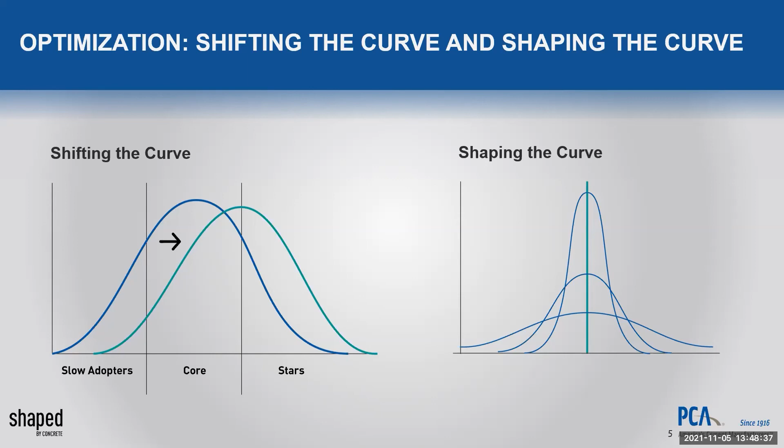So ideally, I'd like to see a very narrow difference between the star performers and the slow adopters. I would like to see an industry that across the board is very innovative and is really pushing the envelope. Next slide, please. So that was thematic concept number 2, call it.

Okay, so optimization, we talked about intentionality. Here's the big theme, the last theme I'd like to kick off with. Society needs concrete. Now, like it or not, every single construction project worldwide uses some amount of concrete. I don't care if you're building a log cabin in Idaho or a skyscraper in Toronto, you're going to use some concrete. And it is truly the universal building material, because even if you're using mass timber, steel, composite, whatever, for the superstructure of the building, you'll still use some amount of concrete.

And concrete needs society. So as I talk about this roadmap, one of the things I want to get across to people is that we can't do this on our own. And by we, I mean the cement industry, the concrete industry. We need everybody who touches our entire value chain to help us out. That's really critical. So society needs concrete and concrete needs society.

Next slide, please. So for those of you that might not be familiar with cement and or concrete, let me give you a distinction here. The analogy we like to use is that cement is to concrete as flour is to cake. So if you're not an engineer or an architect, or you're not involved with materials, that's always a good analogy to keep in mind. Cement is to concrete as flour is to cake. So I represent the cement industry, but cement is only one component of concrete.

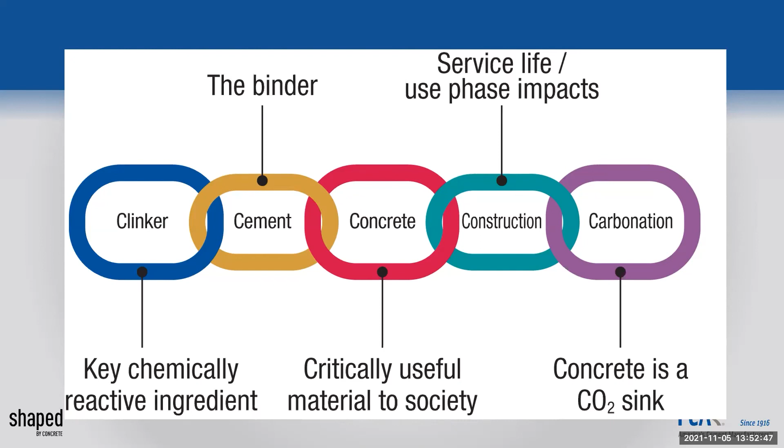Making cement starts off with transforming calcium carbonate or limestone into lime and carbon dioxide. That is the very initial reaction we need. And without that reaction, we don't make cement, period. Now that reaction requires a material temperature on the order of 2,800 degrees Fahrenheit.

Let's put that in perspective. The average consumer's oven or stove reaches maybe 500 degrees Fahrenheit. Surface temperature of the sun is about 10,000 degrees Fahrenheit. So we need material temperatures of about 2,800 degrees Fahrenheit. That chemical fact of life represents just over 60% of the CO2 that our industry puts out.

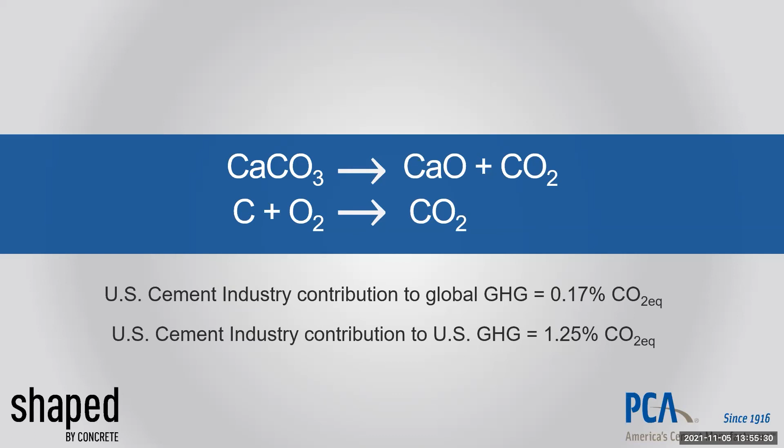So if you look at the US cement industry, we account for about 1.25% of the equivalent CO2 emissions in the US, and just under 0.2% globally. And by the way, CO2 equivalent, so the vast majority of our greenhouse gas emissions are almost entirely CO2, but there are some methane emissions that get included in there.

Next slide, please. Now look, and I know there's a lot of students, so don't ever take anybody's word for it. If you really want to do those numbers on your own and figure out the percentage, you can do that, because the cement industry, by law, we have to report our CO2 emissions. And you can go to the EPA's FLIGHT database. It's publicly available. The acronym is Facility Level Individual Greenhouse something or other, who knows.

But anyway, you can actually go in there for every industry that has to report GHG emissions, and you can screen and filter. And I just checked again yesterday. So if you do that for the cement industry, we have about 92 operating plants in the US, and they produce roughly 66 million metric tons of CO2 equivalent. So that becomes your numerator for that fraction.

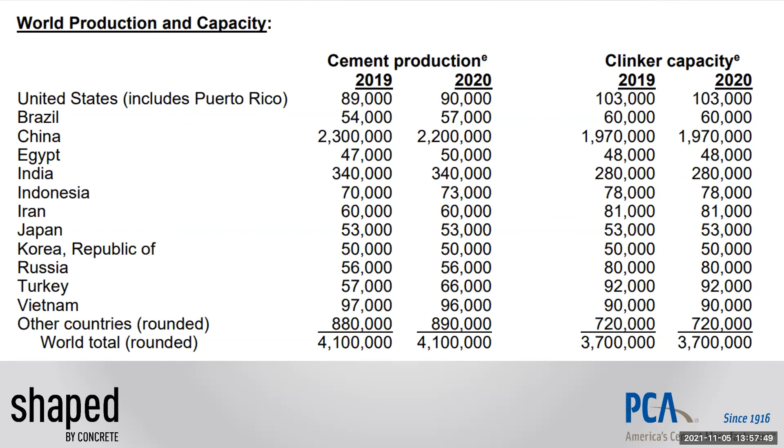Okay, so what can we do to reduce that number? Well, firstly, we can start at the cement plant with this intermediate product called clinker. Now, hopefully you've probably seen fresh concrete, and maybe if you're like a lot of people, you're tempted to put your handprints in the concrete. Please don't do that. Fresh concrete is a very caustic material. It has a pH even more aggressive than lye or Drano. So don't ever do that.

But look, the reason concrete is plastic for an hour or so is because we add small amounts of gypsum to the clinker. So what can we do with the clinker?

And this goes to the point about reducing the amount of CO2 coming from that chemical fact of life. Well, what we could do is take materials that don't have CO2 attached to that calcium. And that includes things like slag and other materials that have calcium that have already been processed, some byproduct materials. Now, our limit there is just the availability of those materials. Well, so that helps us on the process, on the chemical fact of life.

On the combustion side, we can do things like efficiency gains. We're really pushing the edge, though, because our thermodynamic efficiency at a cement plant, roughly speaking, is about 80%. So we can get marginal increases of 1 or 2%. We're not going to see 10%. We're certainly never going to hit 100%. Obviously, I had a course in thermo.

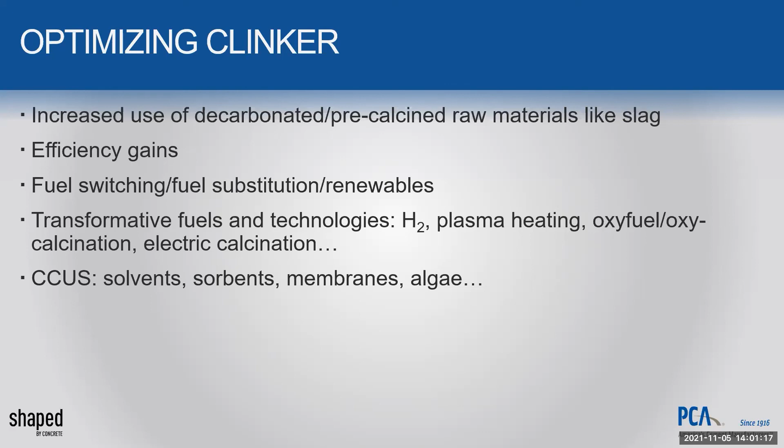And then finally, look, that'll get us part of the way there, but ultimately we're going to have to use carbon capture. So let's talk carbon capture. Next slide, please. Let's go to the next one. There we go. Thank you. So let's talk carbon capture, because carbon capture is huge.

Right now, there is no at-scale CCUS in the cement industry anywhere in the world. We don't know that we can scale it up. Now, I think the technology, I think we're going to be able to do it. We won't do it in 6 months, but I think we can do it in 6 years. That's my prediction. Going to take a lot of research, and some other things too. But CCUS is an integral part of our roadmap. Next slide, please.

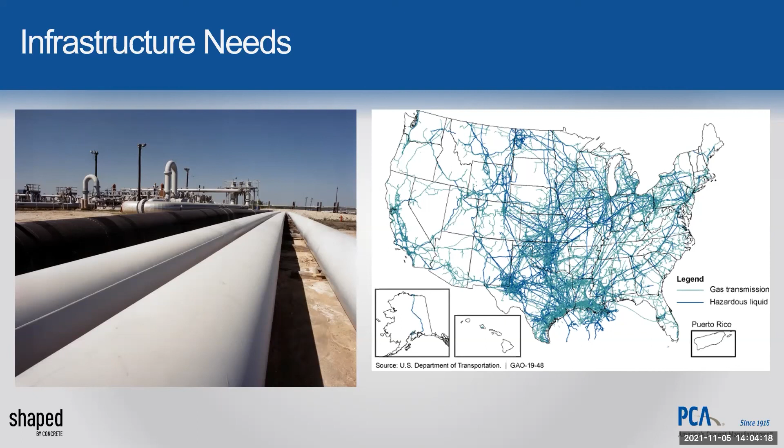And by the way, on the pipeline issue, the other thing is, if we want to go to a hydrogen economy for industry, I hate to say this, you're going to need pipeline capacity, because right now, on-site hydrogen generation is at least 2 orders of magnitude below what we would need to operate in the cement industry, in the glass industry, in any of these industries. Next slide, please.

And this gets to the point about energy. So look, part of the challenge we're dealing with today is that we need a robust and a reliable electric grid. And in some parts of the country, that does not exist. Every single industrial user I'm aware of is desperate to start transitioning to renewable energy. To do that, we have to have grid capacity.

Next slide, please. Okay, so I'm a big proponent of clean energy, in particular wind power. Well, like I said, society needs concrete. Here's a great example. You want wind power. When you see those windmills, keep in mind that underneath that windmill, there's a concrete foundation. In many cases, it's about 15 meters in diameter. So what, 45 some odd feet, and essentially 5 to 7 feet deep. They are huge. As a matter of fact, wind turbine bases, windmill bases represent one of the most single intensive uses of concrete that there is.

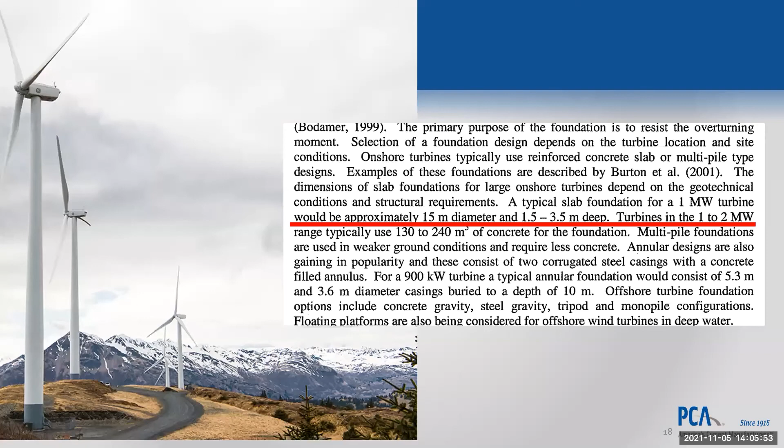Next slide, please. Sorry for the delay. I'm still waiting. There we go.

Thank you. So those are all things we can do on the clinker side. So what can we do once we make the cement? So look, we could reduce the amount of clinker. And for every amount of clinker we reduce, we've got to replace it with something. And there are materials out there we can replace it with. Again, slag is a great material. In some cases, fly ash.

Now, fly ash is a byproduct of the coal energy industry. And even if tomorrow every single coal plant was shuttered, there is so much fly ash that has been landfilled, impounded, and stored over many, many decades that even if only just a few percent of it was worthwhile to go back and process, there's plenty of that material to incorporate in both cement and concrete.

Other things we can do. Shifting from prescriptive specifications to performance specifications. So a prescriptive specification is essentially a recipe. It's a cookbook recipe. Use X percent of this, Y percent of that, and so forth. But you know, the more efficient way is to actually look at what do you want at the end, and that's performance. So in some cases, you want high strength concrete. In other cases, you just want a really durable material.

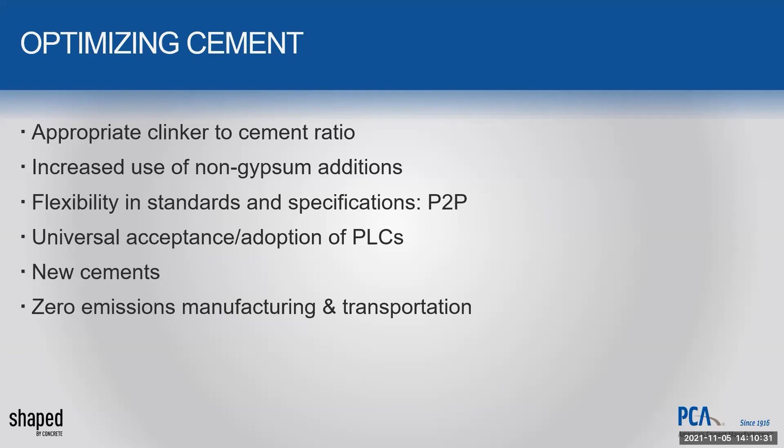I deal with rail carriers who are now trying to transition their fleets from diesel electric locomotives to all electric locomotives. That takes time. That's not going to happen in 6 months or 6 years because they've got a fleet of thousands of locomotives and they have a huge stranded investment. But that is something that they're starting to transition over today. It'll accelerate, but again, it takes time. So those are some things we can do to optimize cement.

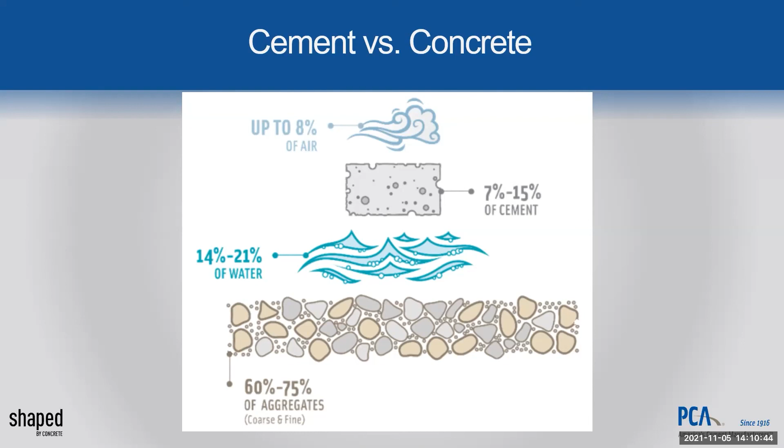Next slide, please. Okay, and we talked about the difference between cement and concrete. So just a reminder, cement ends up in concrete; as flour is to cake, cement is to concrete. Next slide.

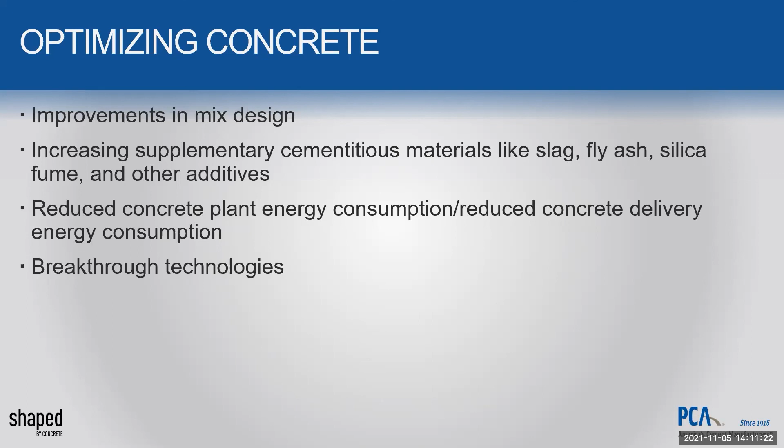So what can we do on the concrete side? Well, look, there's a lot we can do because those same materials like slag, fly ash, silica fume, these are materials that can be used in concrete as well. We can reduce the energy consumption of concrete plants by switching to renewable energy. There are some breakthrough technologies that are out there, but one of the things I want to focus on is actually optimizing concrete itself, optimizing the mix design. So if you could go to the next slide.

So look, when we talk about mix designs, I've already talked about this idea of transitioning away from a cookbook type mentality to performance-based specifications. That's not anything new, but we need people to get more innovative in accepting that. And it's not like we're asking people to take a risk. These specifications have been around for quite some time, not just on the material side, but also on the testing side. And you'll see me here when we get into the Q&A session.

Look, I'm an old guy with white hair, okay? I'm getting close to retirement. One of the frustrating things I have is that I do my darndest to keep up to date with the latest and greatest on research. And one of the reasons why is because at PCA, we fund research fellowships. So I get a chance to deal with the best and brightest. And I'm dating myself, but I'm actually now at the point where I'm seeing students who got their PhD from our research fellowships who are now department heads.

Look, the point is, there are a lot of architects, engineers, building owners. There's a lot of people out there that are set in their ways. They learned one way and they have institutional inertia. It's not so much that they're risk averse, it's just they haven't progressed from whatever class it was or whatever newspaper they read. So a big part of our roadmap is to ask people, look, we want to incentivize innovation. We want people to be in that star performer category.

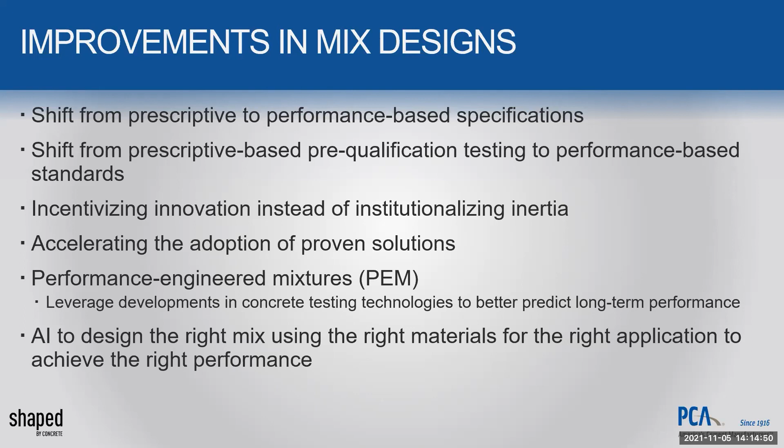Next slide, please. Okay, so we've talked about clinker at the cement plant. We've talked about cement and concrete. Now we get to construction. And again, this is part of the value chain. So you look at the built environment. There are 4 phases. There's a design phase, the actual construction phase, the use phase, and then finally the end of life. Next slide.

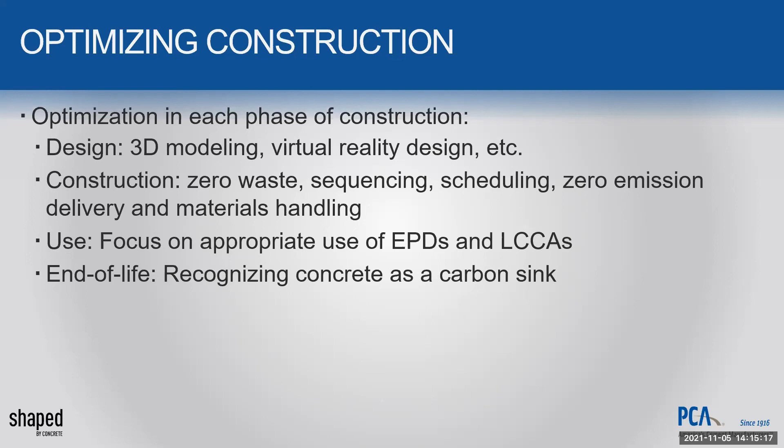So in the design phase, again, there are a lot of things designers could take advantage of today. One of the big ones that I would love to see incorporated universally is augmented reality. You know, when you want to buy a house, let's say 1,000 miles away, nowadays, you don't have to get on an airplane. You can put on a pair of 3D virtual glasses, and you can actually have a virtual walkthrough. And now we're getting to the point where you can get the tactile response of what the finishes look like.

You can increase the lighting or decrease the lighting to see what it looks like throughout the day and throughout the night. People laugh when I say this, but I've got to tell you, I really think that augmented reality potentially will make change orders and punch lists a thing of the past. I really do. I think I'll see that within the next 10 years.

I know on the industrial level, when we're building industrial facilities, you wouldn't do this without augmented reality, without actually walking through the entire site before it even gets down to an electronic drawing file. Next slide, please. So that's in the design phase. You get to the construction phase.

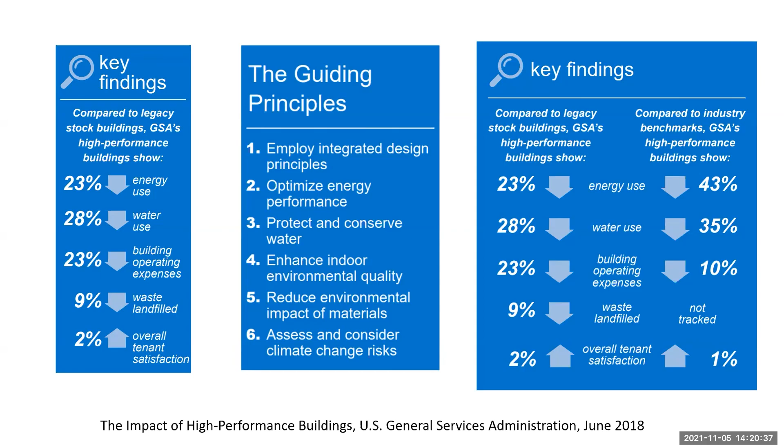And look, if you design for long life, if you know that building's going to be around for decades, you get lower energy use, lower water use. You can make it more economical to operate the building. And by the way, you can actually have satisfied tenants. Next slide, please. Okay, and then the final link in the chain, concrete as a carbon sink.

Next slide, please. So look, most people don't realize concrete will absorb CO2. We conservatively estimate that concrete absorbs about 10% of the CO2 that was initially emitted during the manufacturing and transportation of both cement and concrete. We're very comfortable saying that. We actually think it's a higher number, but until we can actually prove it, we're going to stick with 10%.

Again, don't take my word for it. You can go to the Swedish Environmental Institute, IVL, and Ronny Andersson is the lead researcher there. Ronny, Dr. Paul Tennis from PCA, our government affairs team, the US EPA, we all know about this. And this is sound science that we have known about for decades. And in fact, within the last couple months, IPCC has now recognized that carbonation is permanently sequestering CO2.

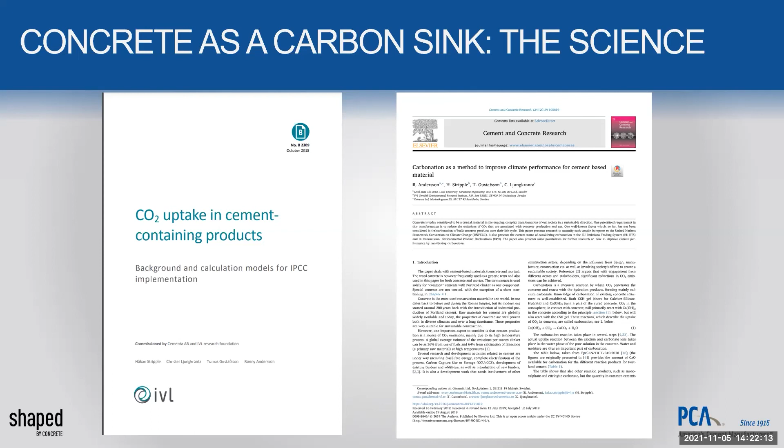So it doesn't happen overnight. It's a function of the surface area that's exposed to the atmosphere, because you're dealing with, what, 400 ppm of CO2 in the atmosphere. And I can send you the links to Ronny's work, but again, lots of information on this. So keep in mind the 10% number.